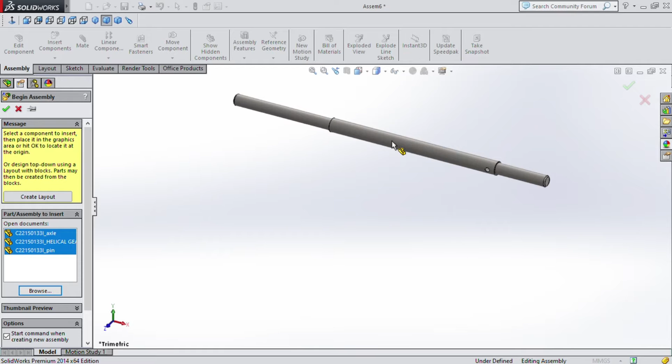So what we do is click new assembly and then OK, and then here we just say browse. So go to the folder which your parts are in, then select the helical gear which we created, axle and the pin, and then open, then put that there, this one there, and that one there. Okay, so now go to our part, this one, right click and float.

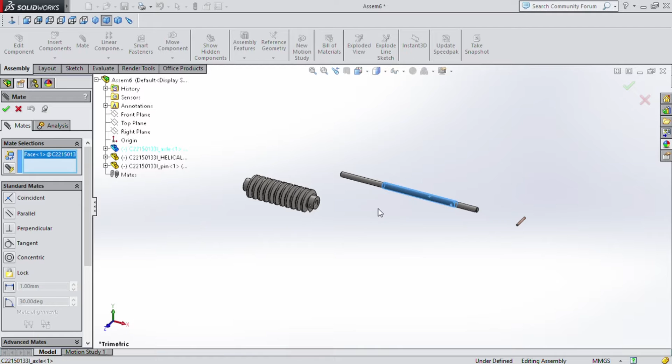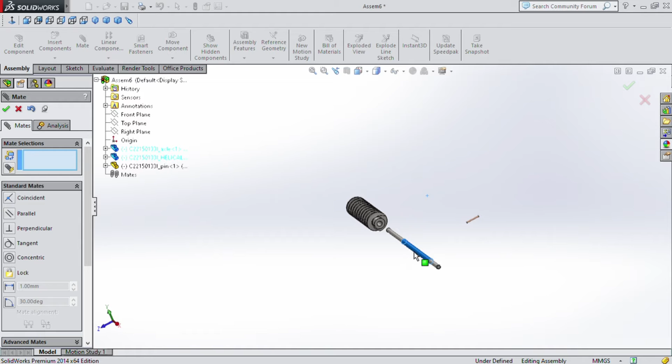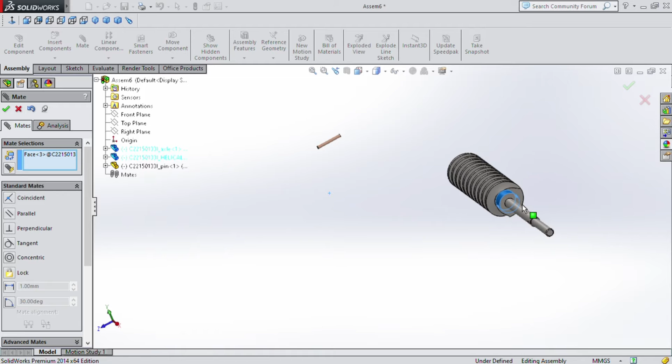Okay, then what we want to do now is to go to mate, then select this face, then rotate your geometries, then click this inner face. Make sure we have a concentric relation and click OK, then hold there and drag it in. Okay, let's hold this one and let's mount. Hold this surface and mount. Okay, let me just select front. Okay, and there it goes.

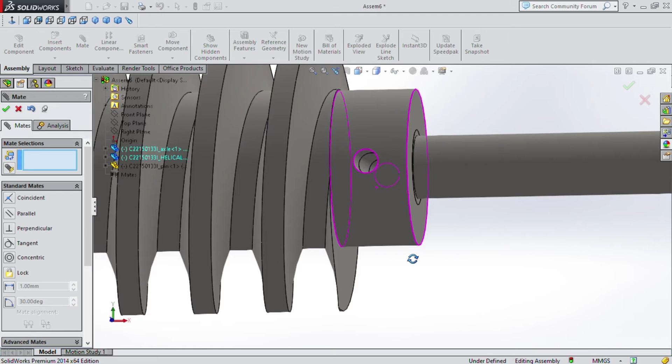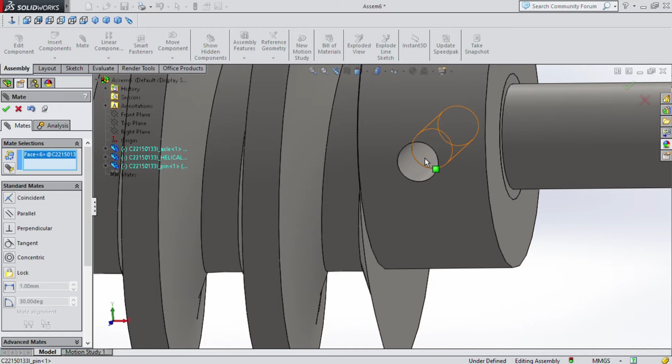Okay, then you will clear and rotate, zoom in, select this inner surface and this inner surface, make sure there's a concentric relation. There we have it. This axle and these holes are now concentric there. So now we go to this surface and we zoom in there, then select this middle one, make sure there's a concentric relation and click OK. Then we hold this face and there it goes, there it fits in.

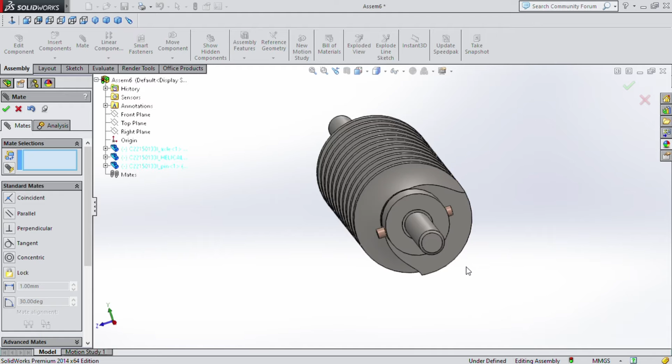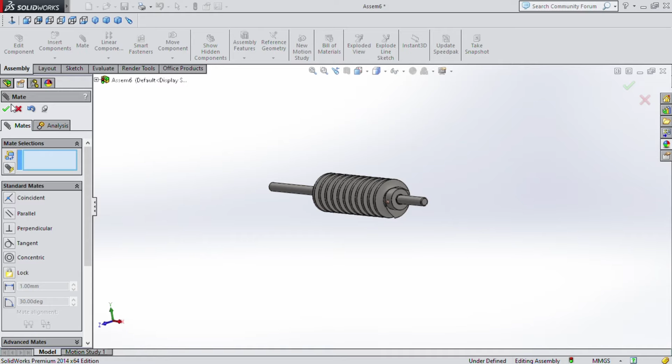Okay, so what we want to do now, select this face and this face and just say lock and then OK, then exit mate, and there we have it. We have our helical gear assembled with axle, and we are done. Okay, now move it. So anyway, then we're done.

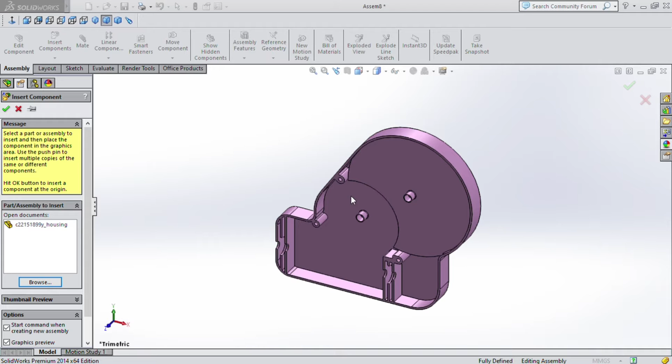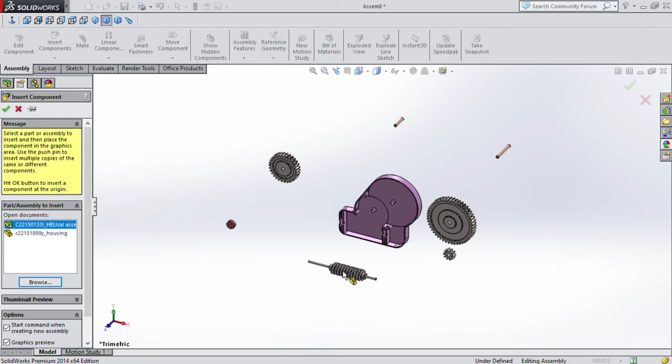Okay, so mount there, there, there. Okay, I just want to make sure this one is not fixed since it was the first. Okay, so the first thing which we do is go onto mate and then select front plane of assembly, then we open our first gear there and we select the front plane of the first gear, make sure it coincides with the front plane of the assembly.

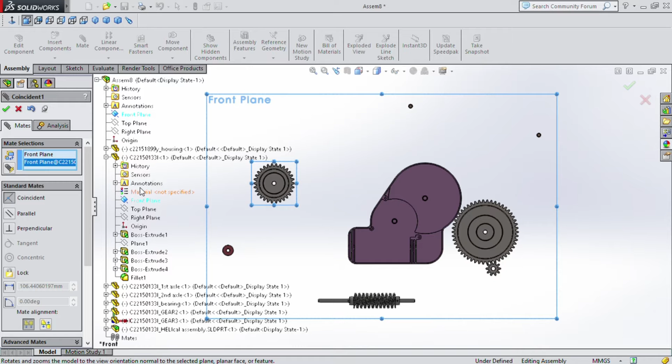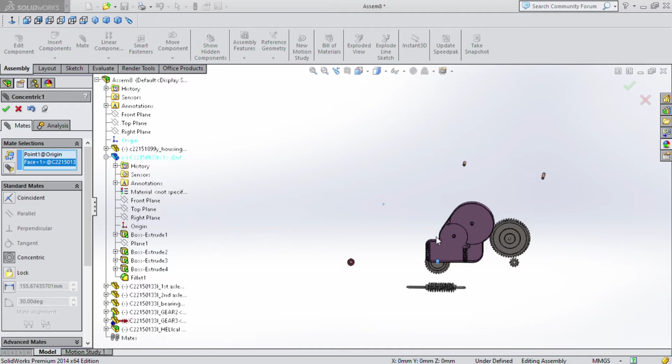Okay, next thing we want to select the origin of assembly, zoom in onto the gear, select this face. Okay, make sure the face is concentric onto the origin. Okay, now we want to exit mate. Okay, move that there. So we have our gear rotating about the origin, then that's okay.

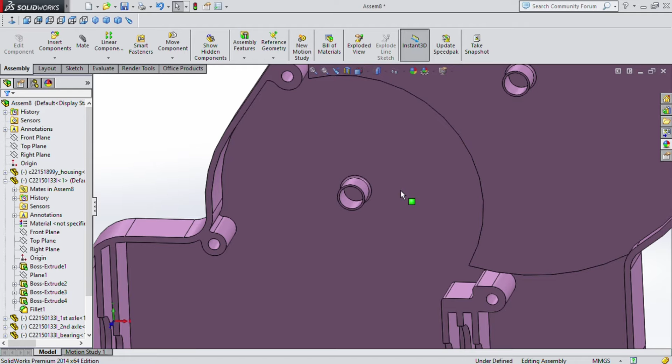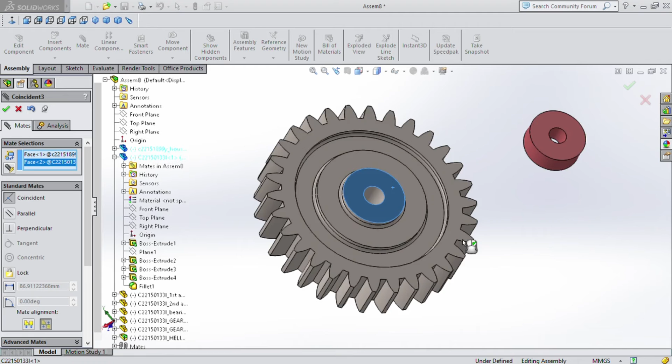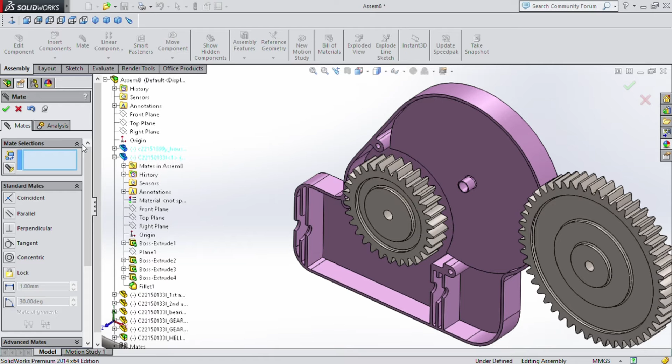Then the next thing we want to do is to select, zoom in there. Okay, let's first select mate, select, zoom in, select this face of the casing, and the back of our first gear, and make sure there's a coincident relation. Okay, what we want next is select this face and this inner face of our first gear, make sure there's a concentric relation. Okay, select front, remove this thing. Okay, so it fits there.

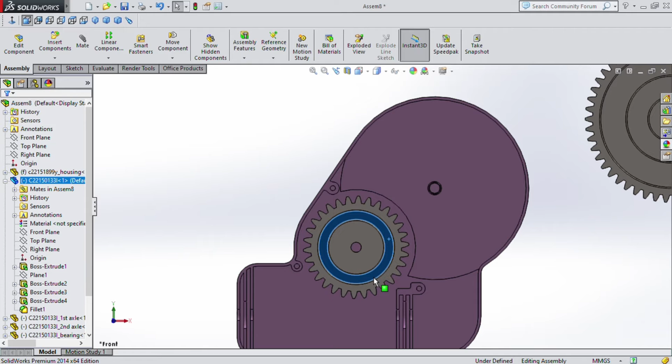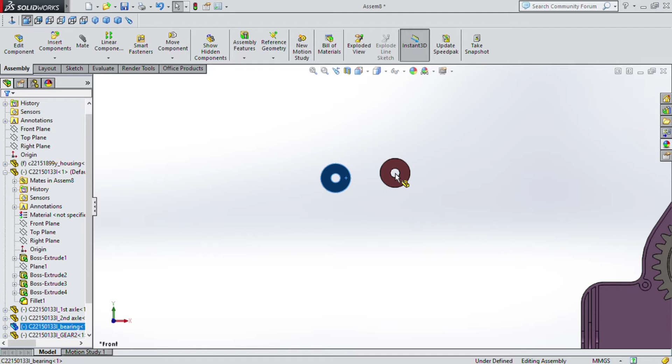And then, okay, let me first exit, let's close. Right click on the case and fix it there. Okay, so we have our gear assembly rotating like that, and we're done. Then what we want to do next is to go to our bearing, select this face of our bearing, hold Control, left click and drag and put somewhere there.

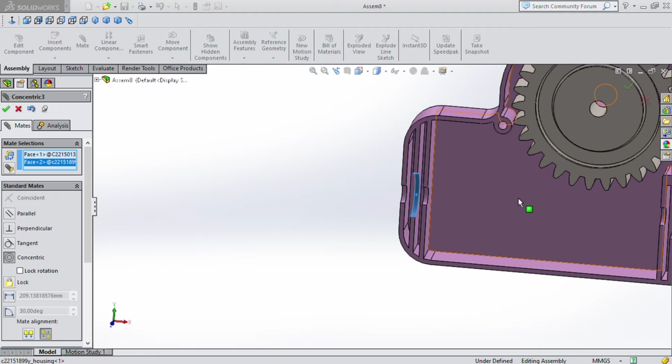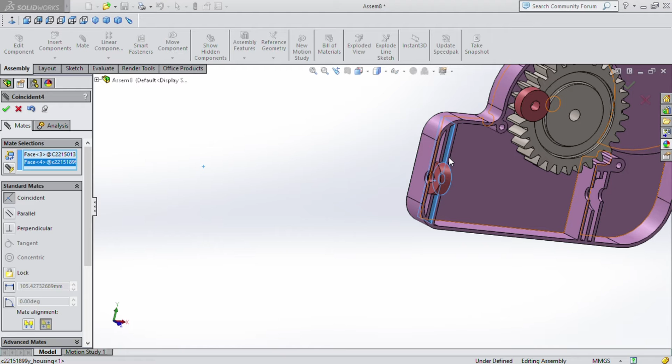Okay, we go to mate, and then we select this face. Okay, and zoom in our case, select this face and make sure there's a concentric relation and click OK. Then it's this one which has rotated, and select this face of our bearing and this face of our case, make sure there's a coincident relation. Okay, and we have our bearing there.

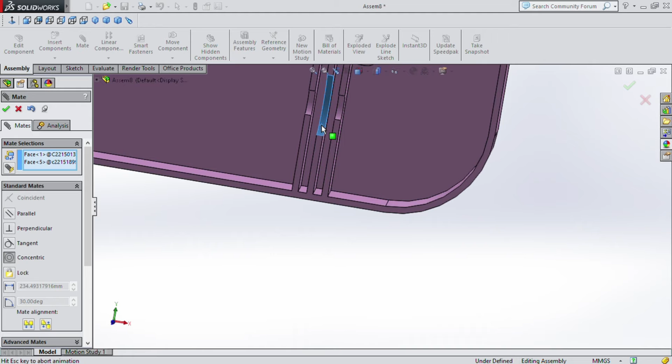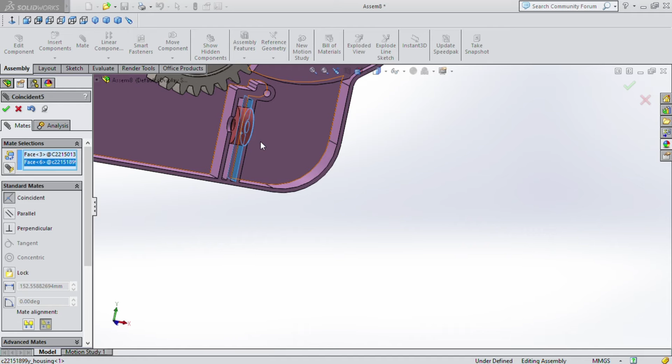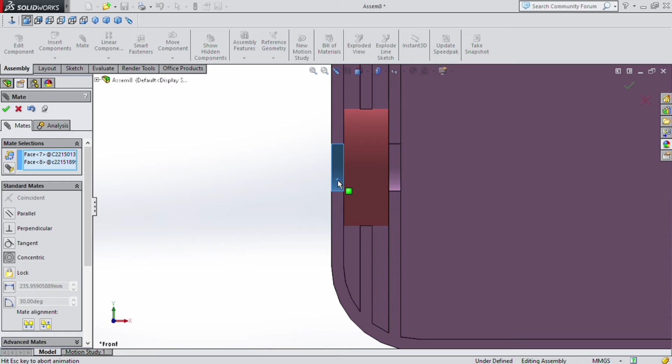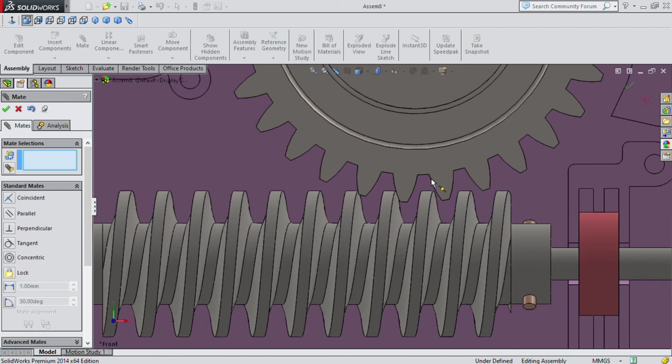Now what we want to do is select this face of our helical assembly, and go on to this face on the case, make sure there's a concentric relation and click OK. Move our helical gear about there. We want to zoom in, make sure our gears are like that.

The next thing we do is select this face and then select this face and select distance, and okay, and now our helical gear is fixed there.

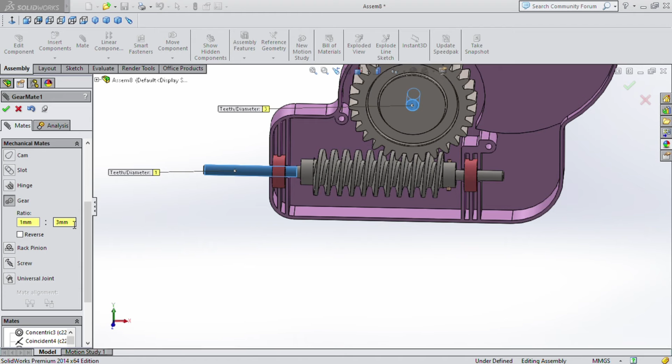What we want to do next, we are still under mates, click mechanical mates, select gear, select this face of our helical gear, and select this inner face for our first gear. Here we specify a ratio of 1. Okay, 1 there. Then this to 3. Then we click okay.

At front, zoom in so you can see it now. We have our relation there. The gear running. Then that's good.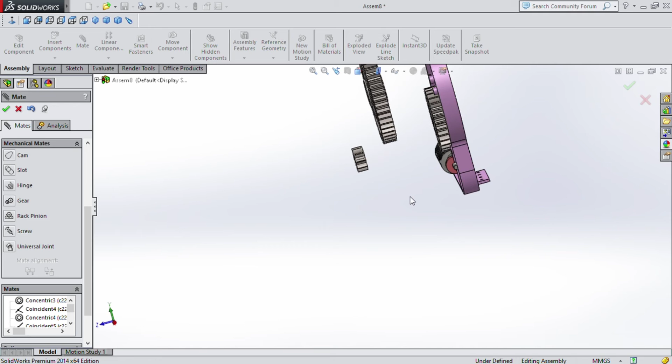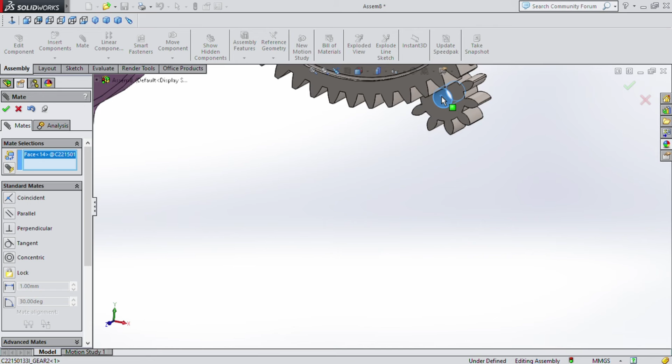Then now what we do is rotate. We want to select the back view of the small gear. Here we make sure we want standard mates. Select this face of the gear and make sure there's a coincident relation. Then we select this face and select this face and make sure there's a concentric relation.

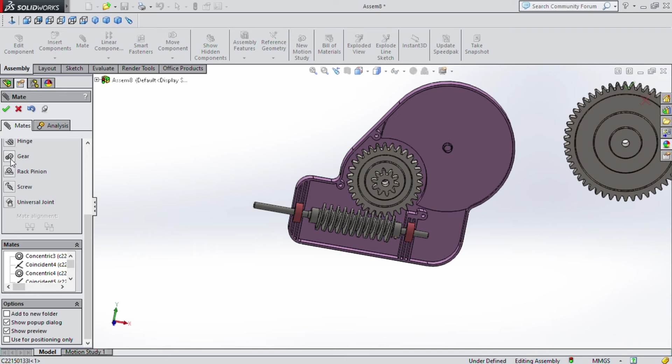Then we go to mechanical mates and select gear mate, zoom in, select this face and this face and make sure there's a 1:1 ratio. So 4.76 and 4.76 is the same as 1:1. Then okay.

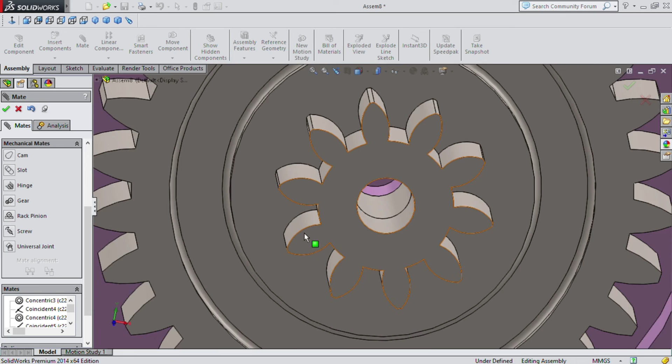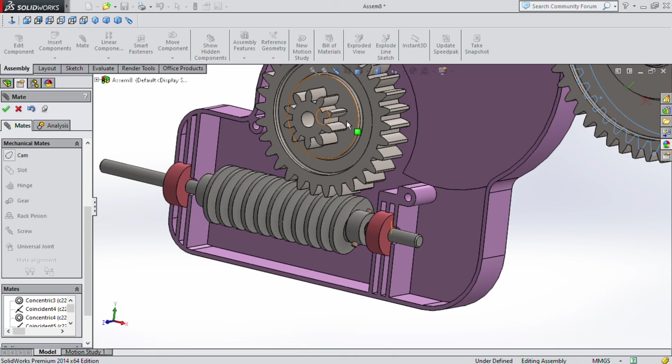And our gears are rotating the same. Now okay, then front. Okay. Then we select this back view of our third gear, and then this surface. Here we should make sure we are standard mates and select coincident relation, and okay.

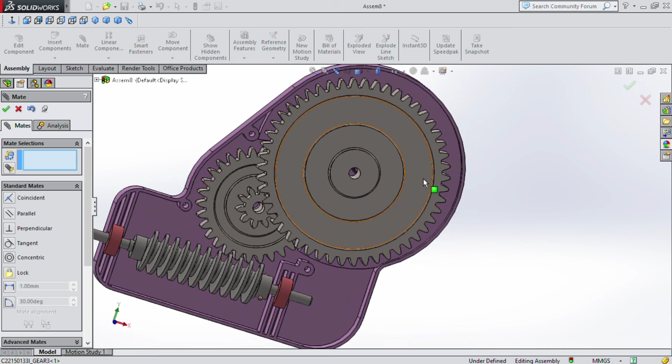And move our gear there. Okay, we can move it out. Then here we select this inner face and the inner face and make sure there's a concentric relation. Okay, and select front.

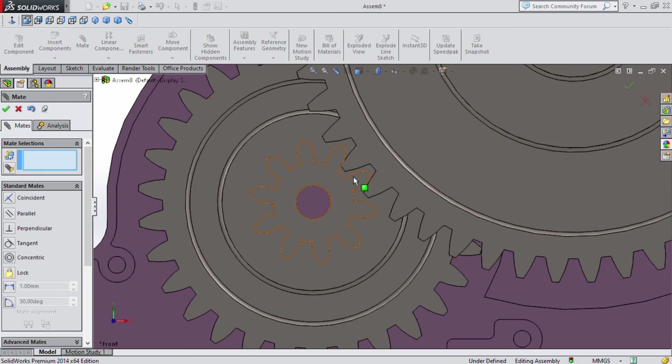And then we'll move our front, zoom in, and make sure there's no bending there. Okay, I want it to be okay.

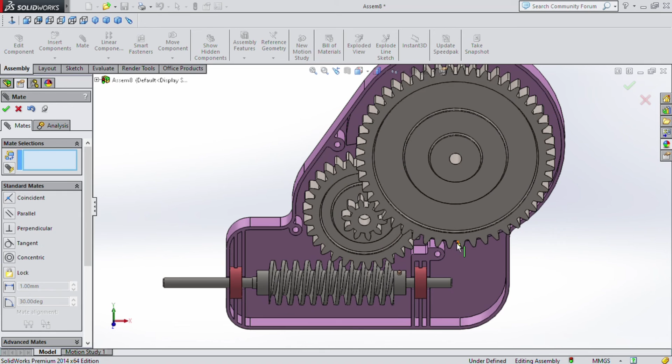And then the last thing we want to do is select mechanical mates, gear mate. First select this face and then select this one, and you want to specify 1 and 5. Then tick OK.

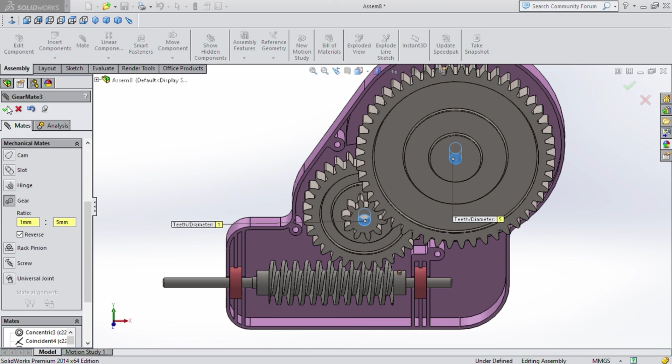And here we go, gears are all running. Okay, the last thing we want to do is to fix our axles. So we select this axle.

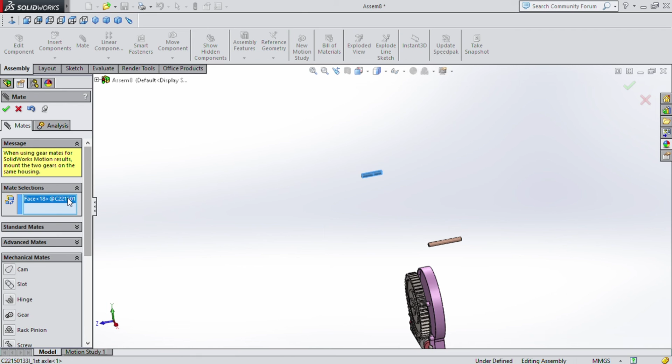Here we make sure we're on standard mates. Okay, and we come here, select this interface, make sure there's a concentric relation. Okay.

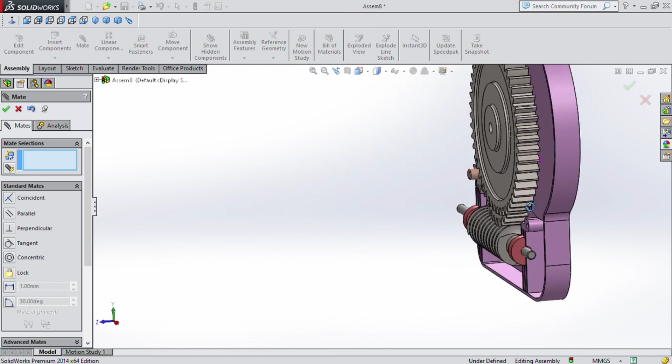Then what we want to do is move our gear inside there and make sure it doesn't come out there. Okay, we need something like that. Okay, then we're left with this one.

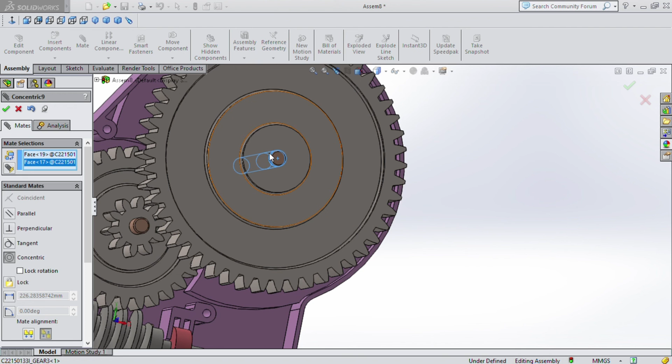Select this face and then this face, and make sure there's a concentric relation and tick OK, and make sure that this gear is not out but it's in there somewhere. Let's see. Okay, we'll keep moving it up to there. Okay, and then we have our

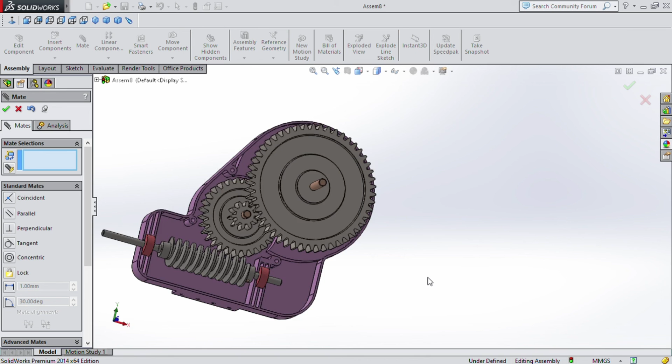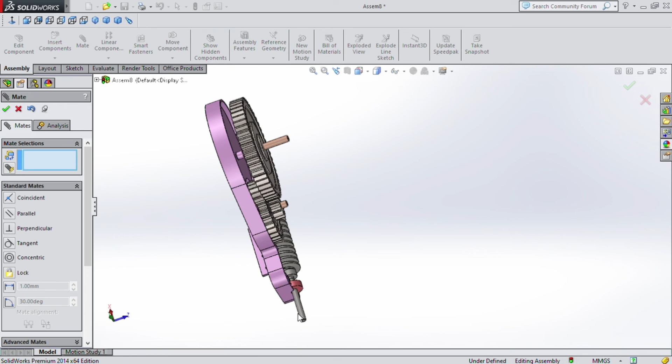Whole assembly. That's if we select this here, you can see our gears moving. Okay, there with our you can see our mounting platform, everything, and make sure that it's now done.